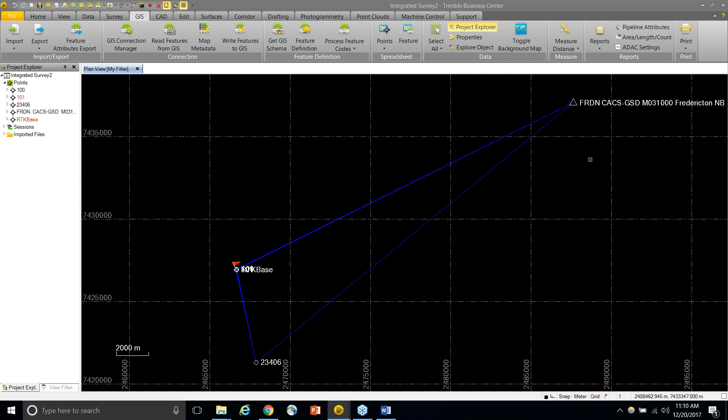Some of you may remember me from past Power Hours, but currently, how this project ties into my situation is that I'm back at school, and the TBC team told me I need to learn a few things before I get back to work. So I've been learning about surveying and doing some GNSS work, and that's what you see in this project, a survey I did for a school project.

How this ties into the question asked by Khatib is that we're going to look at a project that has both grid coordinates and global coordinates in it. If you look at the grid lines in the project here, I'm going to switch my background to white, might be easier to see. It's displaying grid coordinates on the side - that's what we do in the plan view for Trimble Business Center, so you can work in that grid environment.

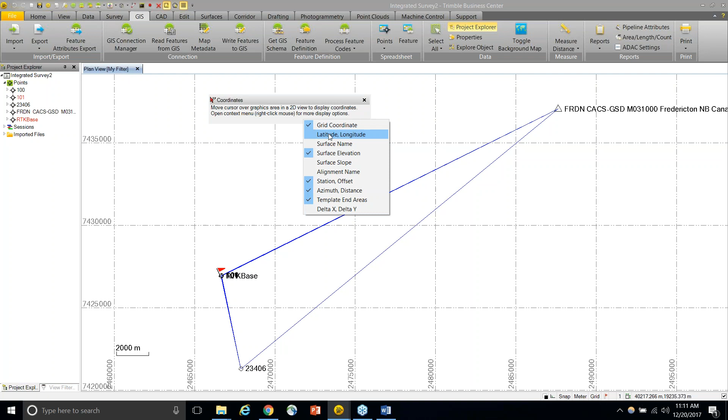But if I wanted to see global coordinates at any time and at any point in my project, I can go down to the bottom right here in this little scroll window. I'll hit that, and notice it displays the real-time update of coordinates as my scroll square moves across the screen. Now I can show global coordinates as well by right-clicking and selecting latitude and longitude. So now I can see both.

So for instance, if I wanted to know roughly what this position was for this FRDN station, I can see latitude and longitude, roughly 45, 56, and 66, 39. Now, to move that back, I can press the close button.

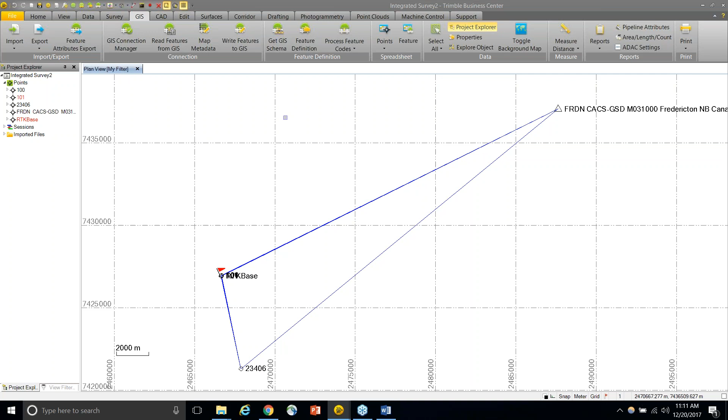Another cool little feature, in the question asked by Khatib, he referred to how do I enter a global coordinate while working in grid coordinates. So for instance, I have these points here on the side. I can add another point by going to the CAD tab and selecting Create Point.

Notice there's a box here called Grid for the coordinate type. I can just switch that to local or global - most likely you're going to want a global coordinate. And now I can type in latitude and longitude.

So if I wanted a coordinate, let's say I'll pick right here, for instance, and we'll select in - maybe we'll select here. I'll select that point, and it will display the latitude and longitude. I can do ellipsoidal height if I want as well, or the elevation. Oops, I didn't select the point.

There we go. And then I can add that coordinate, and I have a new point here on the left-hand side with my global coordinate entered. And if I right click and select properties, I can see those coordinates there.

This works the opposite way too. If I want to enter a grid coordinate instead, I could select this point number 1, right click, and hit add coordinate. Now I could add a grid coordinate if I wanted to instead. So this way, whether you're working from one side, you have the grid coordinate and want the global coordinate, or vice versa, you can do that - a couple options for you there.

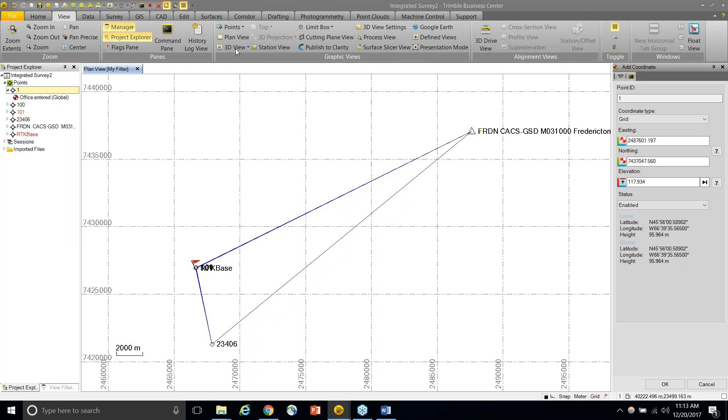Now when looking at these points, such as in a point list or a point spreadsheet, as you can see if you go to the View tab and select the point spreadsheet, I can show the latitude, longitude here, or the easting and northing.

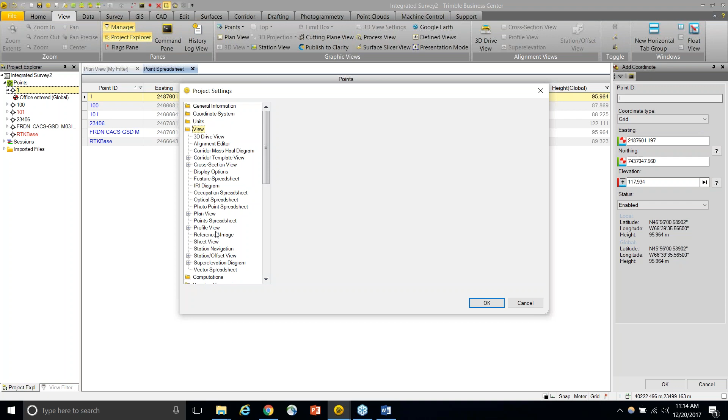This can be changed to show one or the other or both in the project settings, which is up at the top left, under the View tab, point spreadsheet. If I scroll down a little bit, there's a grid coordinate option showing right now, but I could remove that. Let's say I only want to show global coordinates - I'll turn that off, hit OK, and now my point spreadsheet shows latitude, longitude, and height only.

Awesome, so that was the first question asked, and I hope it was answered by that demonstration.

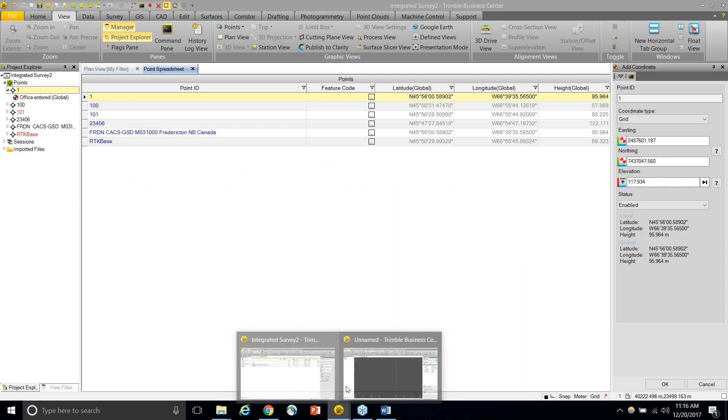All right, good, so now I've got TBC open here. What I've done is opened the import command. Notice on the right-hand side where it shows the file type, I've got quite a few different types of files. As I mentioned, a lot of our users have different hardware in the field - maybe a Leica level, a Trimble total station, a Leica GNSS, who knows. But how do we get all of that different data into one software? In this example, the question asked by Mete, we have some Leica GSI files, as well as an RW5 file, a Leica XML, and a RAW file. Notice with the Leica GSI file, it specifies a GSI format 16 level file.

Now if I right-click on this file, it brings up a screen where I can select various other types of Leica GSI files or similar file types with that extension - in this case a .gsi file. This shows all the specific importers we have for that file type, and in this case several different types. One concern is: what do I need? If I have level data, I'll probably want one of these three formats, depending if you're using international, US feet, or meters. But if I'm using total station data, I probably want to switch to the total station importer. We also have several other file types here that you can import.

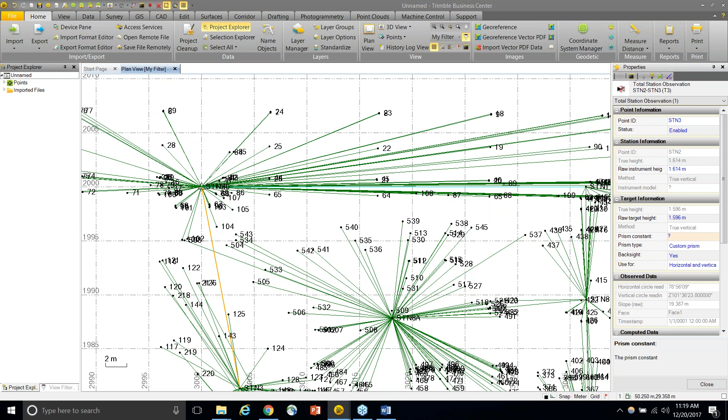In the Leica GSI format, the prism constant isn't included because it's assumed that it's a Leica prism, so it knows the constant. So just be aware of that. You might need to input a prism constant here. Then again, you might not. So some things to note.

Second part of the question is, can I use this data like any other Trimble data, even though it's from a non-Trimble sensor? The answer is yes, of course you can.

So for instance, I could do a network adjustment if I wanted. To do that, I'm just going to quickly set all of the stations here to see the total station data. We'll set the curvature corrections on, and we will go to survey. Let's do a network adjustment. For time's sake, we'll do a quick one, and we'll fix one of our stations and do a minimally constrained adjustment.

Oops, looks like I'm missing a setting there too. I'll turn that on, the sea level correction, and we're good, and adjust.

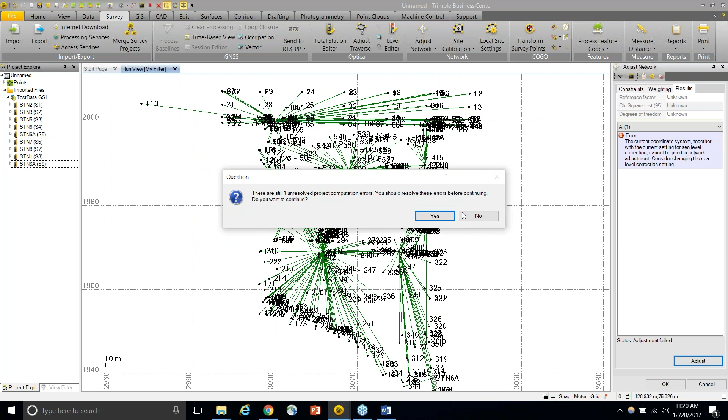All right, so unfortunately we failed the adjustment, but that's not the main point we're looking at here. What we are looking at is this is raw data like you would expect from any other Trimble sensor, but coming from different hardware. So you can take that and integrate it with any of your other sensors, and I can see, for instance, I'll select that station and see the error ellipse associated with it.

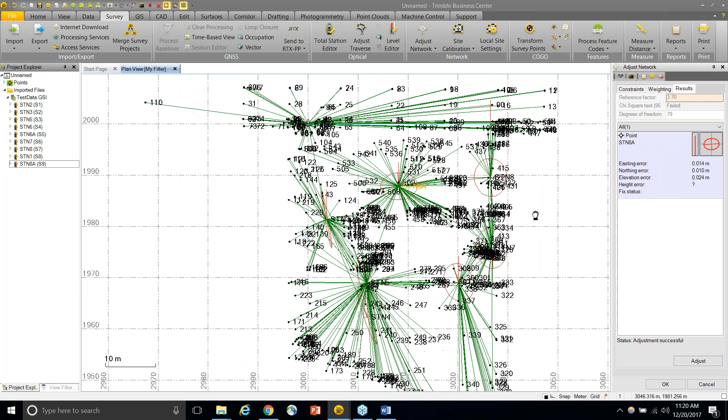Thanks for the great questions, guys, and glad I could participate.

Hey Riley, are you coming back to us? Maybe after I get more educated. I'll learn a few more things before I come back. You sound pretty educated to me, man. Thank you. We'll buy you a razor. It's cold here in Canada, so I'm getting prepared.

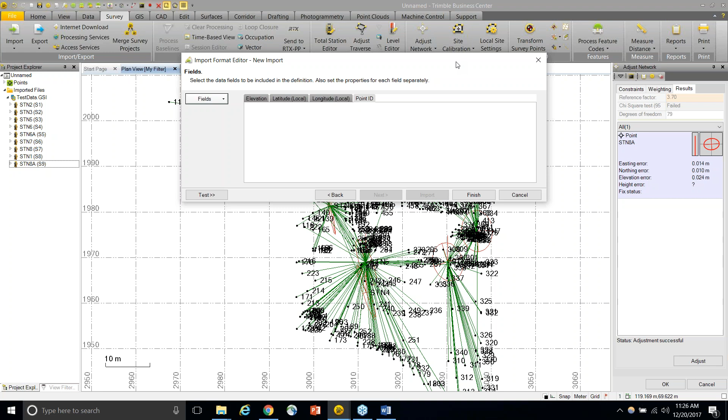Since Riley's got the screen up with the command showing, Joseph asked, can you transfer data from one VCE to another? Right underneath that survey tab there on Riley's screen, you see a merge survey projects option. That will transfer survey data from one VCE into another - give that one a try. It's for the survey data only. The CAD geometry line work will not come over, but survey data will transfer from one VCE to another with the merge survey projects command.

So what you're saying, Joe, is if you change a property of an observation or a point, or you're making a network adjustment or you process baselines, all of those edits are preserved when you merge that into a master VCE. Yes, yeah. If you wanted to organize your data by day, for example, and you had all 30 VCEs for any given month and wanted to get them into a master VCE, that would be the command to use to merge.

Ryan is asking, can you add total station to a GNSS network? I think this is one of the strengths of TBC. When TBC was introduced, or Trimble brought GNSS into surveying, the concept of flat surveys started mixing with the ellipsoid geometry. So one of the best parts is TBC's ability to really integrate those multiple data types. Definitely, yes, you can bring in total station data to a GNSS network. You can also bring level data on top of all of that, and you can decide what holds the elevation, what holds the height, and give weight to different observations.

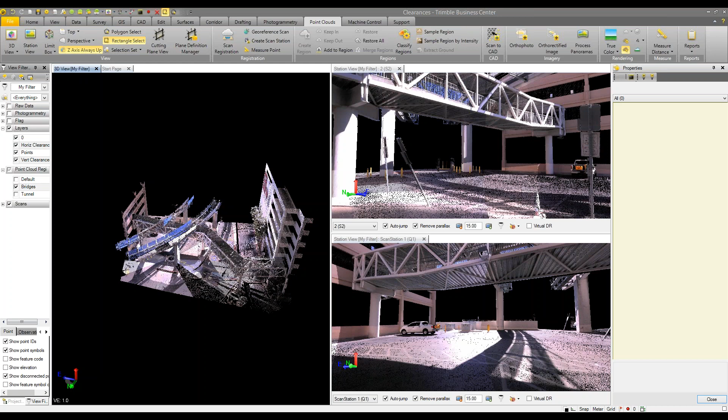All right, can you see my TBC screen? Yes, yes. All right, so what I want to show here is really the use of basic tools that we don't typically fully know in TBC, or we don't know to their full extent. What I have here is a fairly complex set with bridges and passes and stuff. And what I would like to know is really how much clearance I have underneath these bridges. So what you see on the screen is a 3D view. You have two station views of the same area, and I'm going to try to focus and see how much room I have underneath this bridge there.

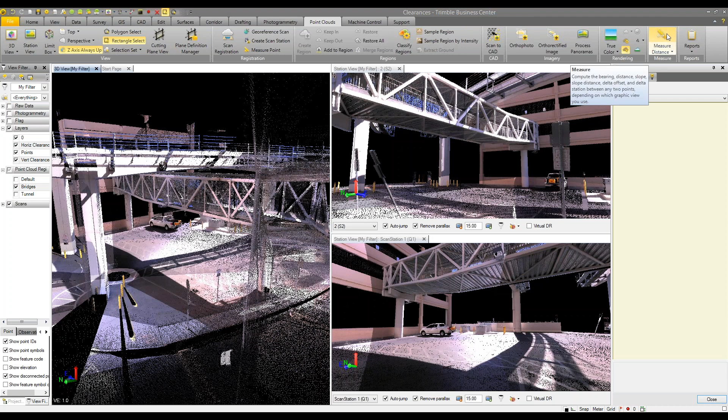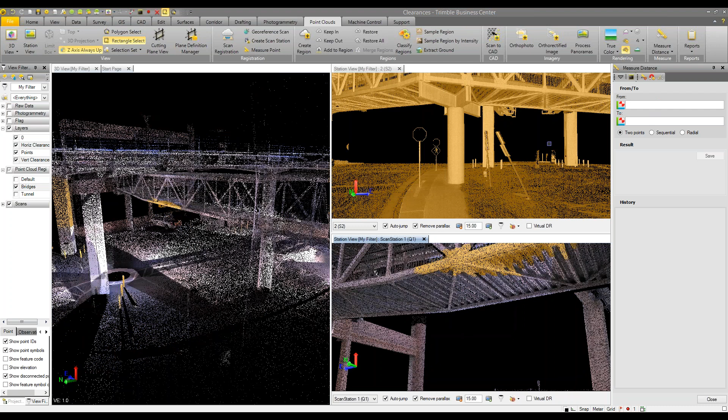So to do that, I'm going to use a simple measure distance tool, a very simple tool. And I'm going to use it from an example from the station view here. I'm going to pick the low point on the bridge here. Oops, sorry, I'm going to pick the... oops. So I'm going to pick the low point, if I can see it. Yeah. All right.

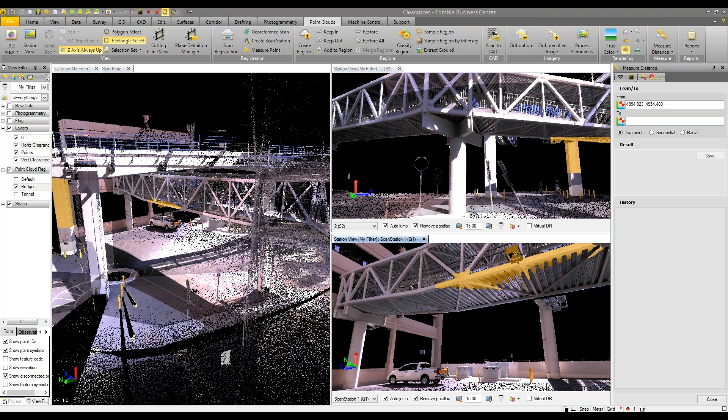So here, you can see the rubber band going from the bottom of the bridge, and I'm going to try to extend it to the ground. Since the ground is pretty flat, it doesn't really matter where I pick on the ground, so I'll just pick there, and it gives me a distance. You can see that distance in all views, and obviously the slope distance is not quite what I'm interested in, but what I can see is the vertical one, and that's the one I'm interested in.

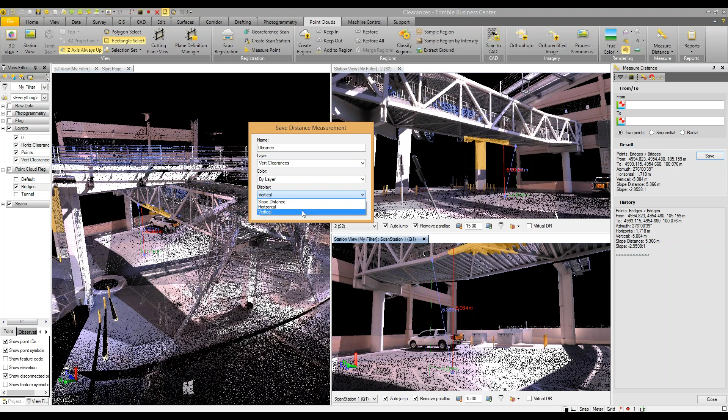What I can do is save it, so I can get back to it. I created a vertical clearance layer that I'm going to put my distance on, and I'm going to make sure this is stored as a vertical distance. As soon as I do that, I can focus on the vertical parts of the measurement, and it really is vertical - there's no doubt about it. This is from the bottom point of the bridge to the ground.

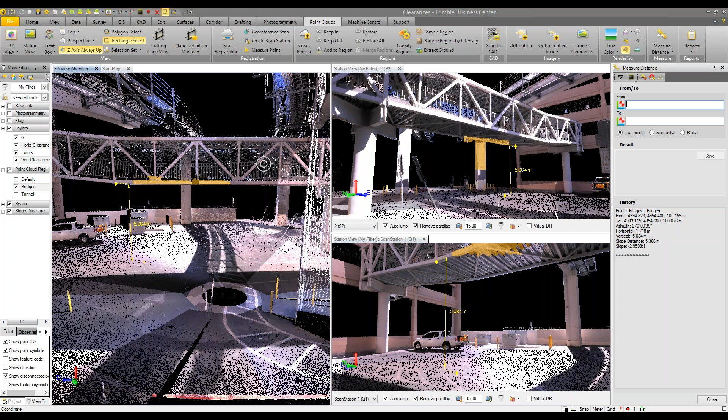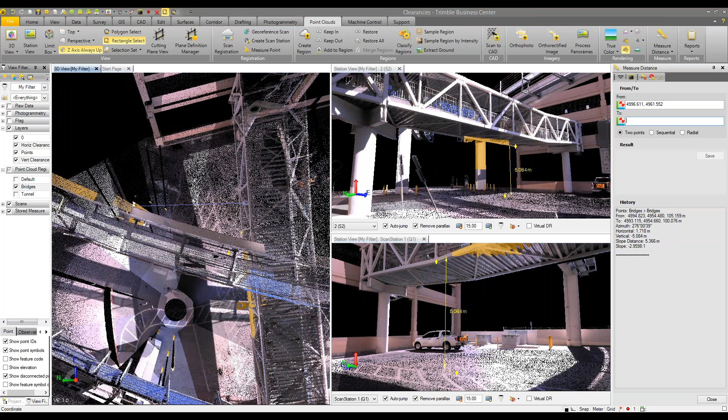What I can do as well is measure horizontally - for instance, measuring from this part of the bridge to another section of the bridge to see how much width I have here. So I can pick somewhere here, and same thing, it doesn't matter whether the heights are the same. What I'm interested in here is the green distance, which is 6.9 meters.

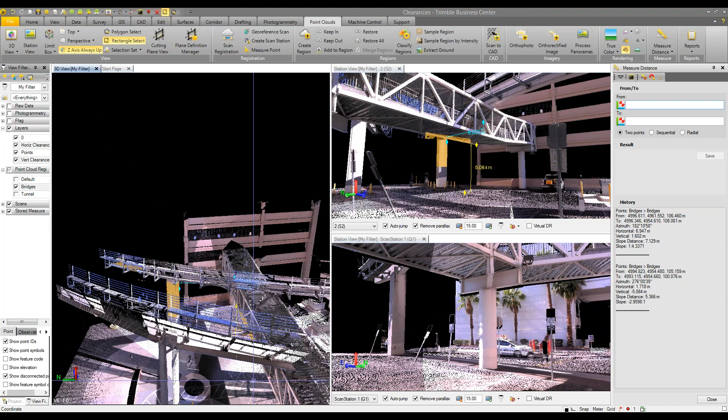What I can do is save it as well. I'm going to put it in my horizontal clearances and make sure it's stored as horizontal. Once I save it, I can see really the distance between those two points. I can keep going and measure another one here if I'm interested in a different part of the clearance - for instance, between this beam, from the bottom of this beam to the ground, and I can see it once again there, and save it in my vertical clearances.

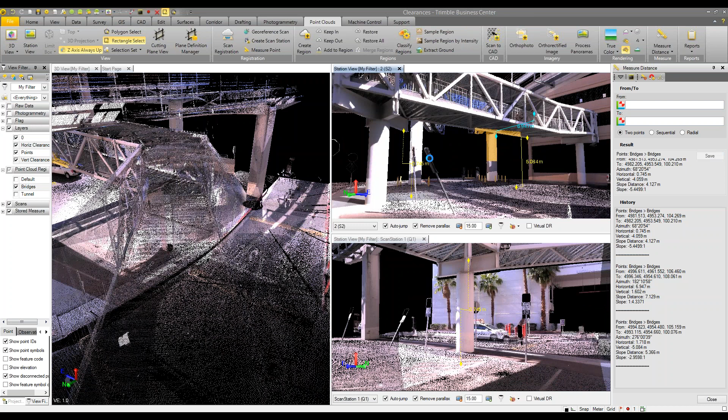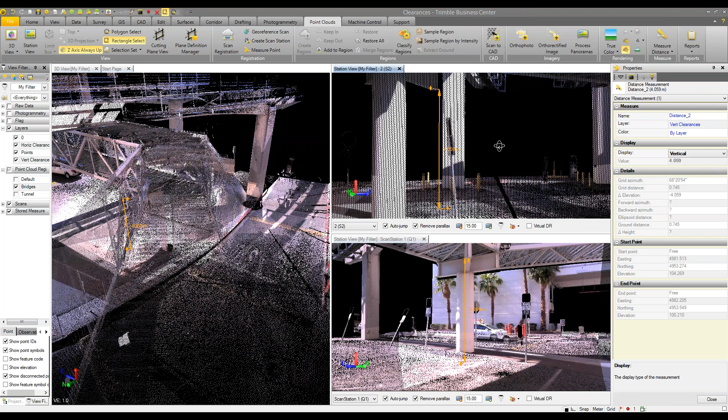If you pay attention, you realize that I didn't save it as a vertical clearance, I saved it as a horizontal one. So what I can do is select this one, get the properties, and change it - to a slope distance, horizontal, or the vertical one. In that case, this is actually the vertical I was interested in. So that's how you can do vertical clearances in TBC.

There is another workflow you can follow using a cutting plane view specifically, and this is interesting when the ground is actually not perfectly flat. In this case, I'm just going to clean this up, delete those, and bring a different point cloud that I have - it happens to be a tunnel, and this tunnel has a little slope to it.

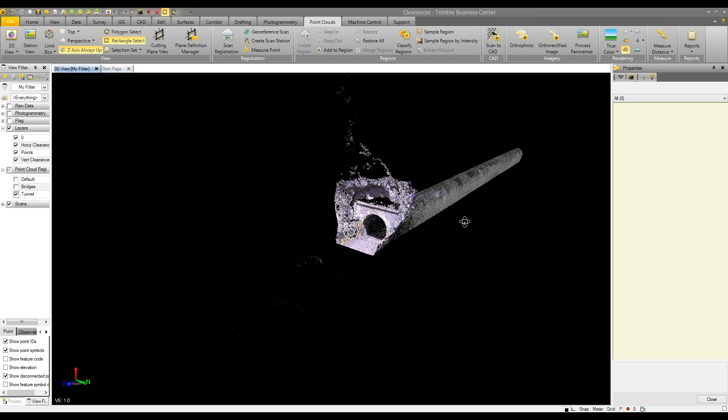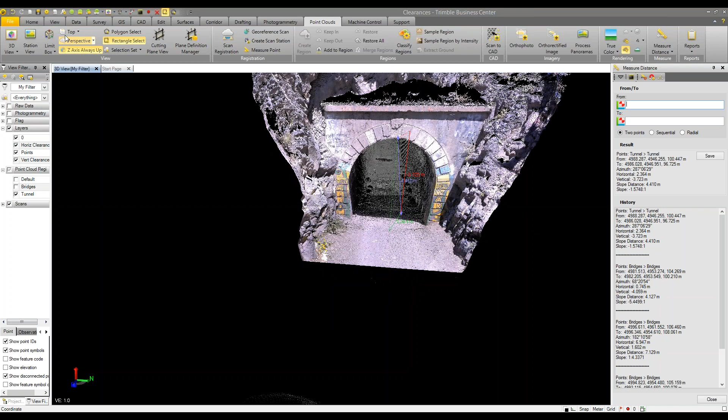If I follow the same workflow and do a vertical distance from the top of the arch to the ground, since the ground is not perfectly flat, if I look from the side of it, I'm going to see that this is not actually a vertical clearance. So even the red distance there is perfectly vertical but it's not the true clearance.

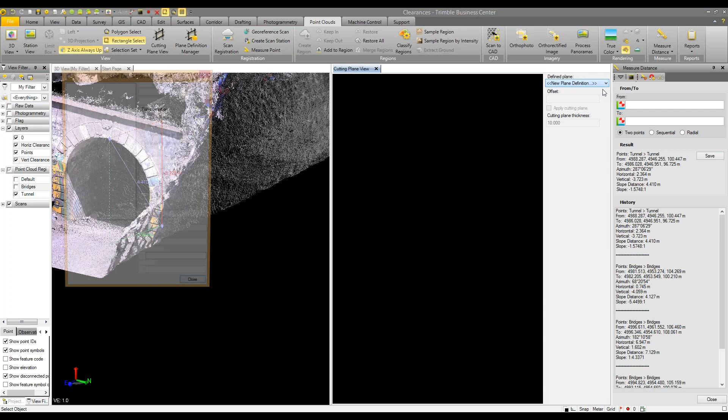So what I'm going to do in this case is use a cutting plane view, because that's going to help me a lot constrain the picking in the plane that I'm interested in. I'm going to create a cutting plane view, and since I don't have a plane yet, I need to define it. I'm going to create a plane and make sure that this is a vertical plane, passing through this point that I pick on this face and that point that I pick on that face.

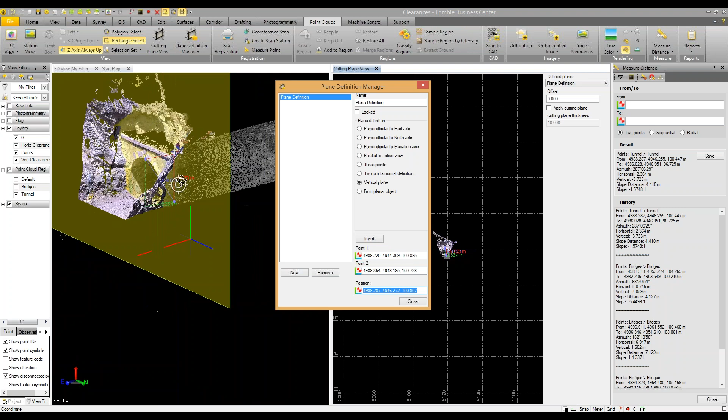If I zoom out, I can see that this is really the plane I'm interested in for the vertical clearance. So I can close this and zoom in on my cutting plane. In this case, that's great, but this is a lot more than I'm interested in, so I might not do the picking correctly.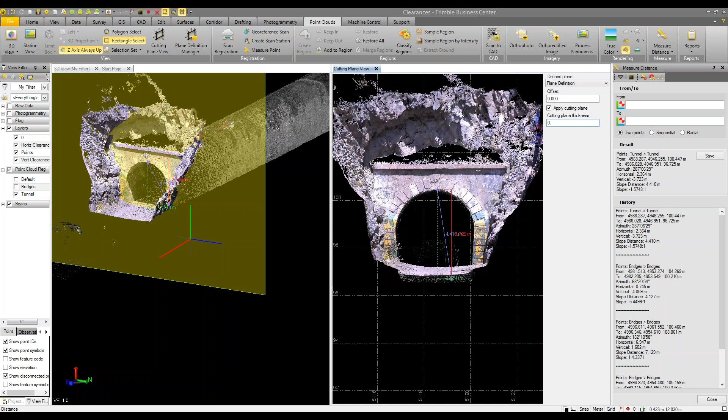What I'm going to do on top of this is check this box and actually cut the plane and restrict it. In this case, I have a thickness of 10 meters - 10 meters may be a little more than I'm interested in, so I'm going to do 20 centimeters, and that's going to restrict even more. Now I'm very confident that I can pick the distances, even with a little angle, a lot better than before.

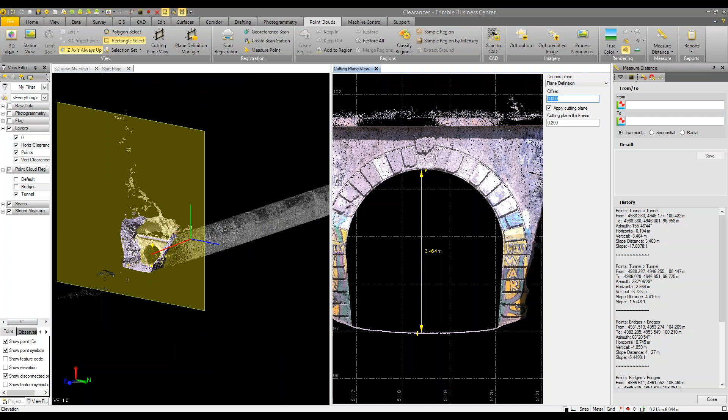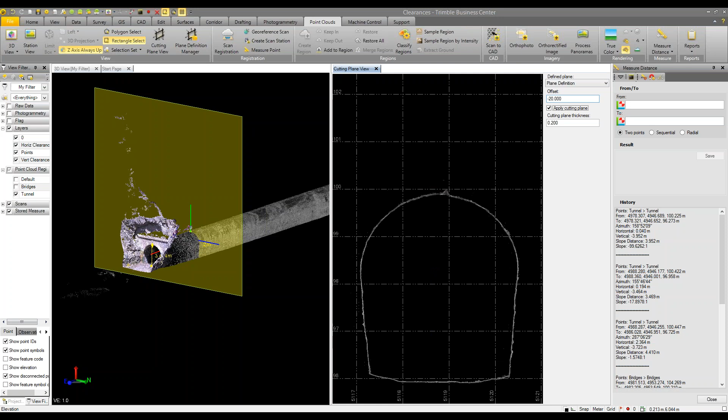So if I save this one, I make sure it's a vertical clearance that time. I save it, and we can see that it is actually perfectly vertical and exactly in the plane I'm interested in. Furthermore, let's zoom out a little bit - if I want to do a clearance at a given distance along the tunnel, I can go 10 meters further, add a little offset to it, and that's going to move the plane further. I can keep going and do the vertical clearance, measure it, save it again, and go 10 meters further, again and again.

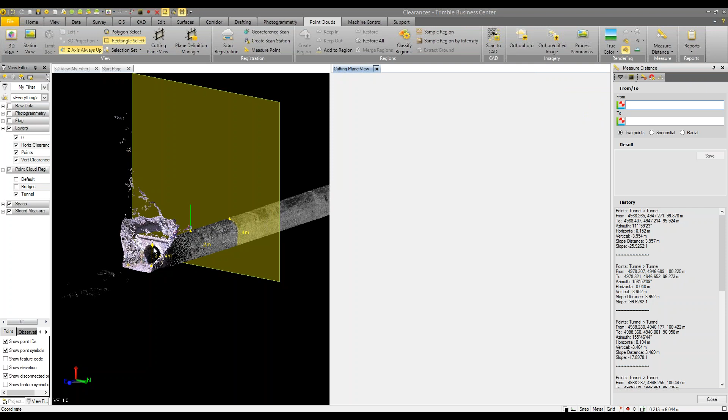In the end, I used the cutting plane view, slicing it at a given position to constrain my view and my picking, so that when I pick, I have full control of what I'm picking on. And if you look at this terrain, I have the different clearances all along the terrain, even though there's a slope to the tunnel. This is a good way to utilize a very simple tool, the measure distance tool, to measure clearances and width.

And I think that's it for the vertical clearance. Yeah, that's a great demo, Arnaud.

There's been two questions that came in from Babek, or Tobe, on how do I get saved distances into Drafting, and how can I share them outside of TBC. There's two answers that come to mind immediately. We've got a dimensioning routine that will export into CAD, and we've also got a new web-based data sharing service called Trimble Clarity that lets you publish data on our Trimble Connect platform and share that information with clients with a simple URL, which can compute basic clearance measurements as well.

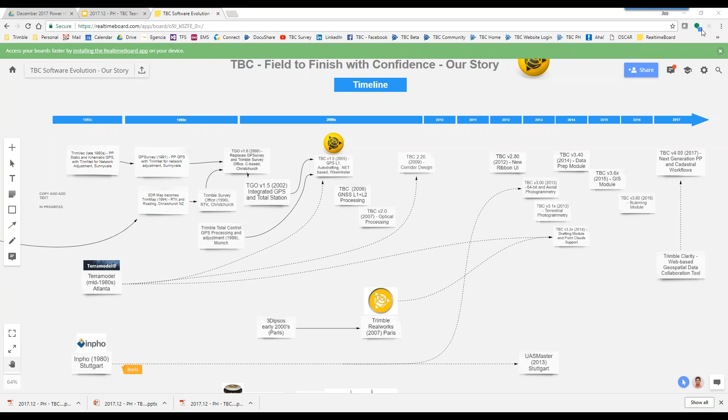Excellent, thanks Joe. Before we talk about the future of TBC, I'd love to quickly recall the past. I get this question very often, like, when is Trimble going to start introducing another software? It's been an industry trend in recent years that major vendors reintroduce their platforms or re-platform very frequently. I can assure you that from TBC's perspective, that's not going to happen anytime soon.

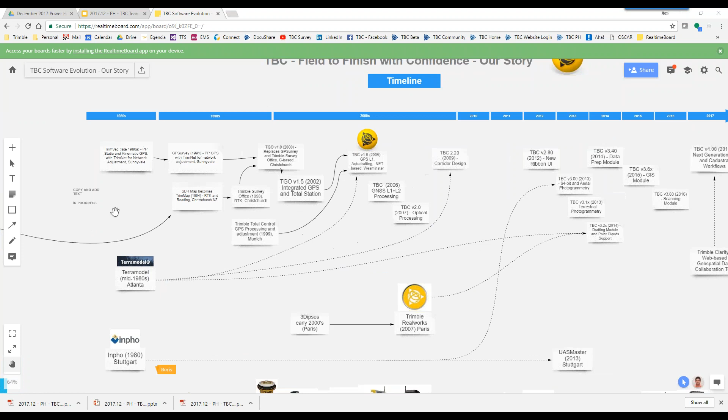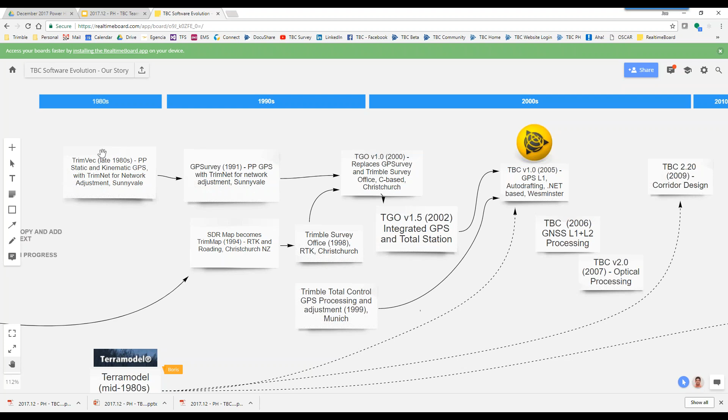This is just a short chart, so apologies, it's more for internal use, but it shows our history in the software going back to the 1980s, where we had TrimVec that did the post-processing, static and kinematic. Probably some of you on the call recall this much better than I do. I actually started using Trimble software in the early 2000s with TGO, but we also had a software called Terramodel, which I'm sure a lot of you are very familiar with.

This just shows the history going from TrimVec to GPSurvey with the same TrimNet module for network adjustment. We had a software from New Zealand, SDR Map, which actually didn't become Trimble Survey Office, but the same team worked on it using a different code base. That was the first attempt at a Windows-based platform.

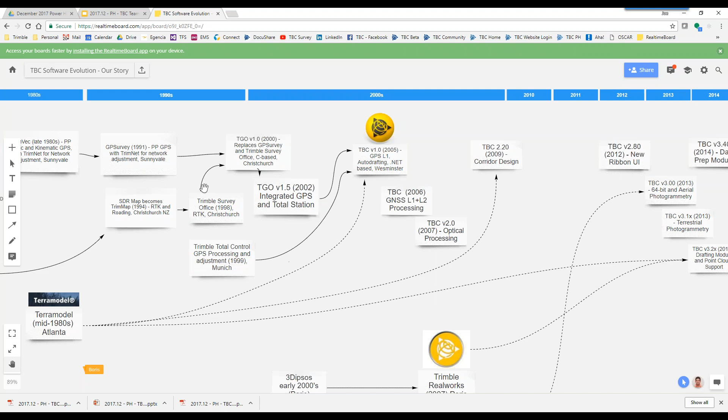So then we decided to really merge the capabilities into Trimble Survey Office, creating TGO version 1.0, and that was a fantastic survey software, if you all recall. Then into TGO 1.5 later, we integrated both GPS and total station. We were asking ourselves, what are we doing, reinventing a new software every few years, if you look at that history. Then we also got a new team on board from Atlanta, from the TerraModel team, and development on TBC actually started in the early 2000s.

I believe it's 2001 or 2002 where the platform was created. The idea was, instead of reinventing the wheel and doing a create line command in 5 different Trimble software packages, let's figure out how to build a platform that multiple software groups in Trimble can use. So we started this platform called Symphony, on which TBC was born in 2005.

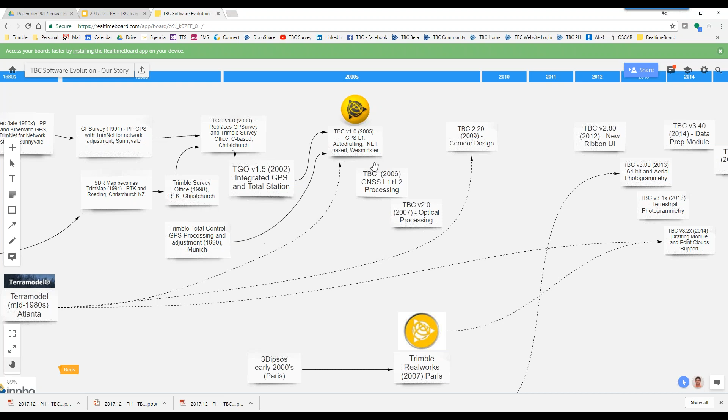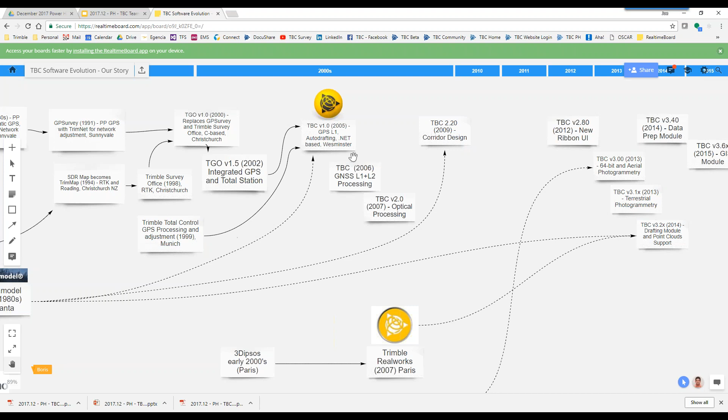The first release of TBC was L1 processing only. A lot of the auto drafting and feature coding was actually contributed from the Atlanta team. We started incorporating TerraModel commands, which came more heavily a few years later, because there was a lot of groundwork to be done around surface creation, corridors, and other features we wanted to get from the TerraModel team first.

You can see the evolution here: after GPS L1 only, we started adding GNSS, then optical processing in TBC 2.0 in 2007, and corridors came later in 2009.

You all remember the pain points we went through when we introduced the new ribbon UI, moving away from having thousands of icons on the screen.

TBC 3.0 really started as the 64-bit version of the software. Computing power was becoming more of a commodity at that time, versus the early days where it took a whole day to process a baseline.

We really excelled and started expediting all of that development. The reason TBC has grown so much is because of the contribution of all the teams mentioned earlier. All of those teams continue to work on TBC, so now there's a larger pool of Trimble engineers contributing to the Symphony platform.

Not just TBC benefits from it, but also the heavy civil edition of TBC, software like PostPack, cadastral software in Germany and Japan that Trimble provides. A lot of groups in Trimble may use just a single component of TBC, for example a create surface function for SCS 900 or something like that.

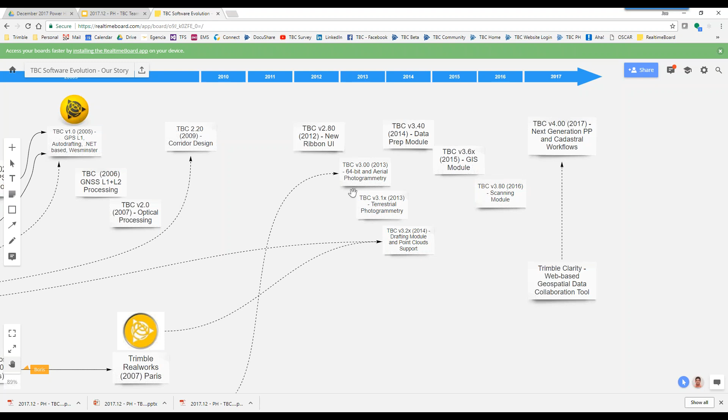That's really a success story, and one of the reasons we were able to crank out so many releases, as you've seen in the last 5 years.

We started adding terrestrial photogrammetry in 3.1, leveraging Trimble Vision capabilities, and adding a drafting module, again contributing that TerraModel concept with the DynaViews.

Trimble RealWorks played a critical part in providing us with point cloud capabilities, like what Arnaud was showing with managing point clouds. TBC can manage virtually unlimited numbers of point clouds using the exact same engine as Trimble RealWorks. So all the development that happens on Trimble RealWorks benefits TBC, and vice versa — that's the power of collaboration in a larger company like Trimble.

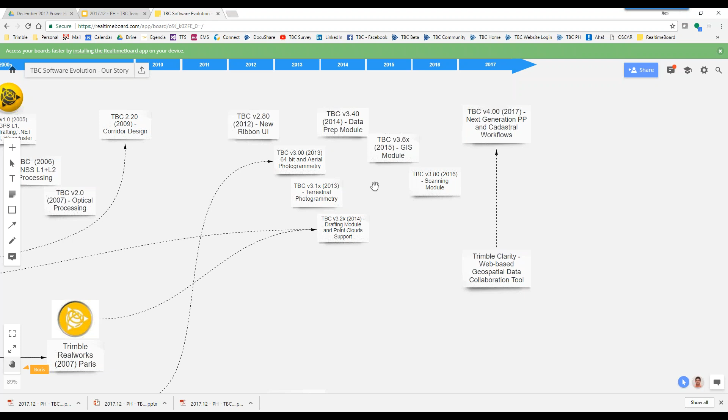We added a data prep module in TBC 3.4, GIS in 3.6, and a scanning module with the release of Trimble SX10, along with some registration and automatic classification capabilities later in 3.8 in 2016.

Now in 2017, as Joe says, we started focusing back on the core — basic cadastral routines — and leveraging more cloud-based capabilities, because you live in a connected environment where people don't want to move data multiple times. Trimble Clarity is the first example of how we can leverage and benefit from those collaboration tools a bit more.

Goes back to the presentation. I hope this history overview was interesting for some of you. I think it helps understand how we got to this point today.

Our mission is to be the survey office software enabling field to finish with confidence. So we are not a design CAD, we are not an enterprise GIS — we are a survey software.

We see a need among surveyors who might use one or two commands from GIS or CAD. If we can introduce those in a way that surveyors think about, we can be very successful and provide a complete workflow, keeping in mind interoperability, as Joe said, with all the other players out there. So our message is really about capability, but also compatibility.

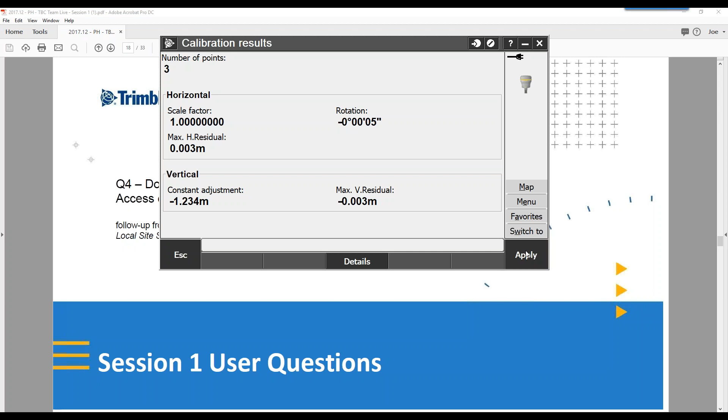So now if we apply this, I can actually take the same job from the Trimble data. Let's make a copy of it, and we can drag that into TBC. Open up a new project here, and we can just go ahead and open our site calibration.

You can see we have these same basic options. We can set that scale factor to 1 again, and we can make it so it's just a vertical shift. One extra thing we do have in TBC you might notice is this update product definition.

This is really helpful if you're dealing with GNSS points that might be based on a state plane grid or another grid system. You might have coordinates in the millions, and you're calibrating it with known grid points, or just local 1,000, 1,000. So you might need to do that if you're dealing with grid and ground. You'll get some really high scale factors if you don't change your product definition to where it should be in your new calibrated system. You can also see down here that we're actually in a calibrated coordinate system.

I need to click on that, but just hover over it. And we can go into our point list here, back in site calibration, and you can see we have these same pairs already in there. We have the same options to use them for horizontal, vertical, just horizontal, or ignore them. So we'll recompute this, and we'll actually delete the old calibration. We'll say yes, and we should get the exact same result.

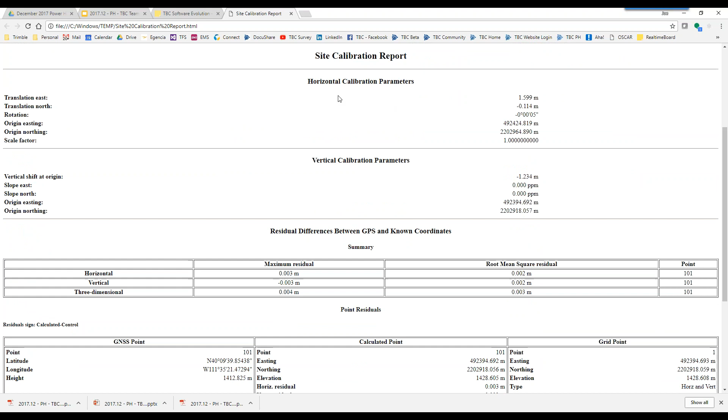And the one final thing is we have reports we can generate up here. We have the site calibration report. You can click on that, and it will open up this new HTML report. You can save that. It basically has all the information you could ever want about your site calibration, coordinate systems, any ground scaling, local site settings, and then your actual calibration parameters, residuals, and coordinates.

So hopefully that answers that and shows the differences. Like I said, fundamentally the same, but hopefully there's a little bit extra you can do in TBC.

Yeah. Thanks, Adam. Thank you, Adam. Back to you, Joe.

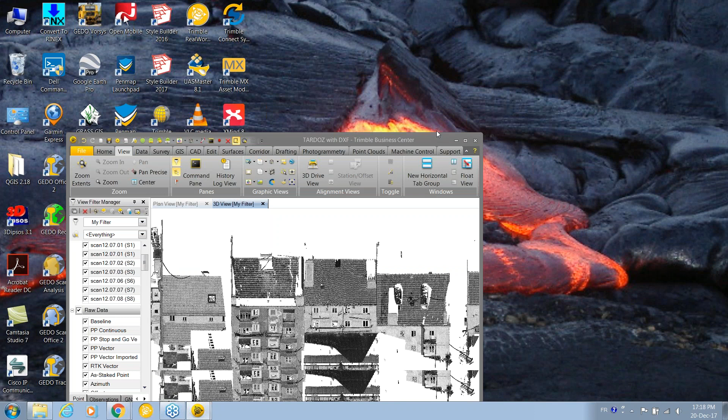There we go. Can you see my screen right now? Yes, perfect. So yes, definitely we can do all this inside our Trimble Business Center using the SX10 data. Just need to move that screen away. Sorry, so you can see my TBC right now, right? For everybody on the call, this is a different French guy. Yes. Maybe Arnaud, you can tell us a little bit about yourself.

So my name is Arnaud Lezenec in French—it's better. I've been with Trimble for 20 years now, started with Mensi. So 3D scanning is like my working life, I should say. I'm glad to show you some point cloud; I'm fairly familiar with them.

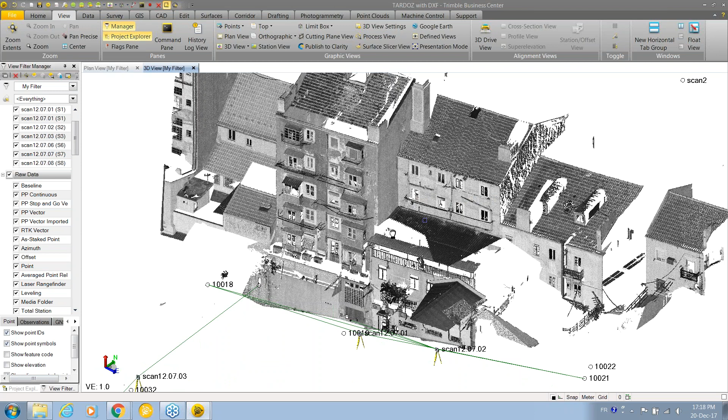So that example is a real example from Portugal, where the client bought a Trimble SX10, the scanning total station, to do a corps de rue, as we call them in France—basically building elevation. I will show you different techniques, and at the end we try to do some drafting, because the customer was gentle enough to give me the final result. So here is the point cloud.

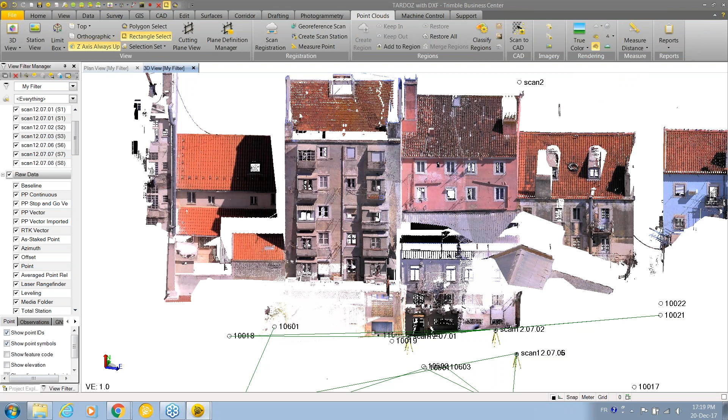As you know, in Trimble Business Center we have that point cloud tab. I'm going to switch the point into true color because, as you may know, the Trimble SX10 has very powerful cameras built inside. So first thing I will do is the segmentation to select the building—I'll show you some little tricks.

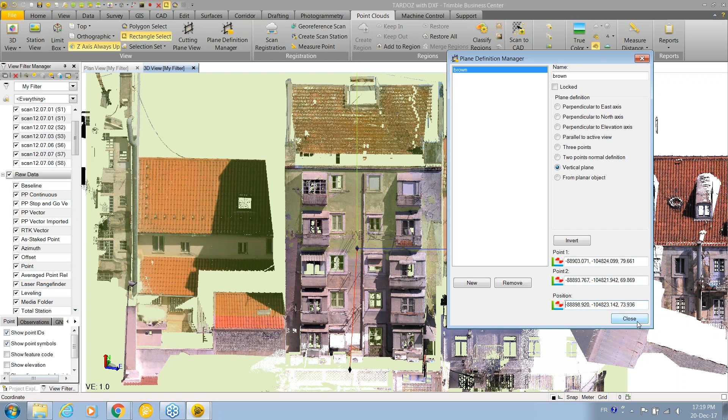Arnaud did show you some as well by doing a new plane definition. So I will make a new plane, give it a name—that's fairly important as well—make a vertical plane, and select two points on the facade and a third for its position. Voila, and now I can go to the cutting plane view.

Basically, I'm going to do some segmentation using that tool. So Arnaud stole my tricks—that's fairly sad for me, but you already saw that, so I'll show it again. To keep that building, I could change the thickness, let's say to 2 meters, to just keep the building facade.

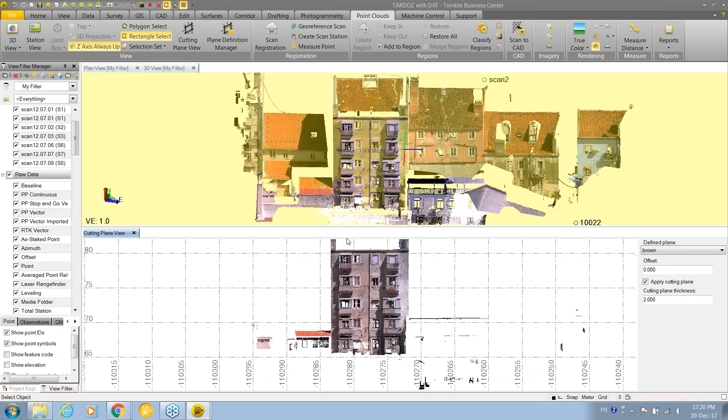Then the next step inside TBC, we've got that CAD tab—CAD menu, we can do many CAD drawings inside it. So I'll do it quickly: I can make a rectangle, give it a name, and use that little button to make the auto advance, so I can do several rectangles in one shot.

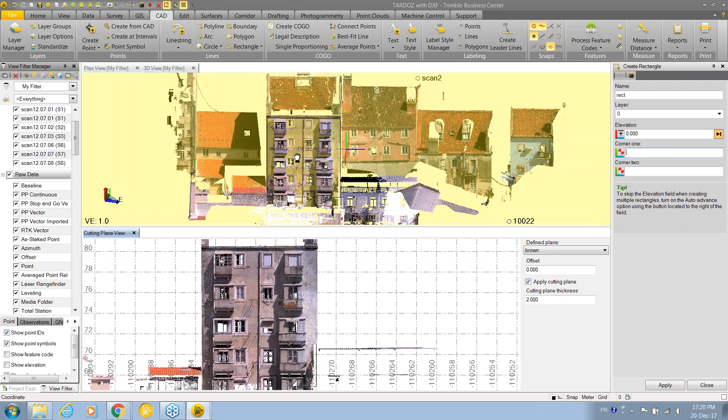So let's say I do the shape of the building—now you can see it coming in the 3D window on top, I hope you can see. And I can do some little windows; I'm not doing a very good job here, but just to show you the principle—doing some drawings inside, and then you can continue, of course. I could spend a few hours on that topic, but I'll stop here for that one.

The next thing we can do, and it's a big request in Europe for instance, is to do an ortho photo from the scanned data.

So we get that ortho photo menu. Basically, you follow the steps: what do you want to use, depth, grayscale, or true color? Then your plane definition - I could make a new one, but I want to use that building facade here. Now I can pick two points to define the area for my ortho photo.

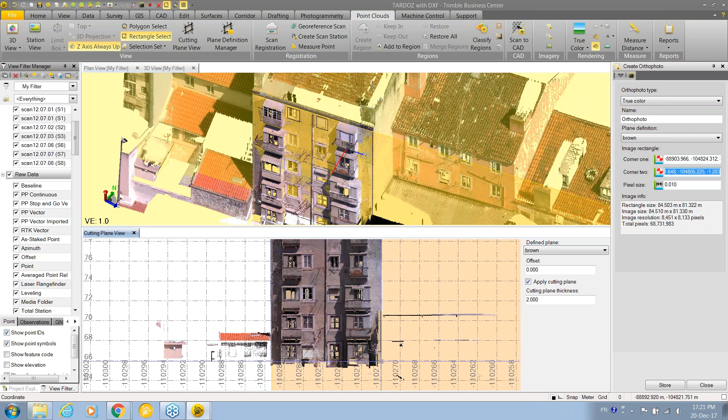Then you define the pixel size of your ortho photo, and then you can create it by just pressing store. So basically now I'm creating an ortho photo, and then I can use it also to make my drawings, or I can export it to third-party software if you want to.

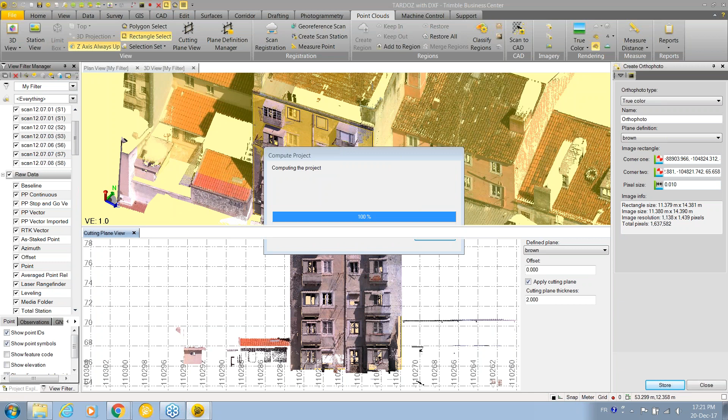But you can do also everything inside Trimble Business Center today. So we can see it in the list here - it's here, orthophoto. I can just show it like this if you wanted to see. I have too many screens in front, but this is a result of my orthophoto.

And then we can also export it, so you can just go to export into the CAD menu or to image exporter if you want to use it for another software. Another option you can use with the Trimble SX10, you can take a panorama automatically with very high density in terms of pixel. So what we can do as well is to make a rectified image.

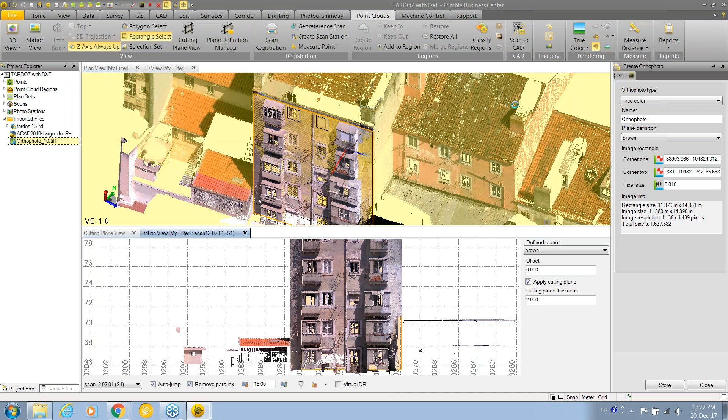So when I press a rectified image, I'm going to switch into a station view inside Trimble Business Center. So the customer did some resection because the road was so narrow - they had to move on top of some buildings on the other side, as you can see. So let's switch to station 6 here, at the bottom I'm going to switch to station 6.

Now we can see a bit better that pink building, but as you know, as you can see in 3D, it's a different depth. So what I will do, I will define a new plane. I just need to move that window back here - a vertical plane again. I'm going to pick points in 3D, one here, one there, and one here for the position. So now I move my plane to the correct location.

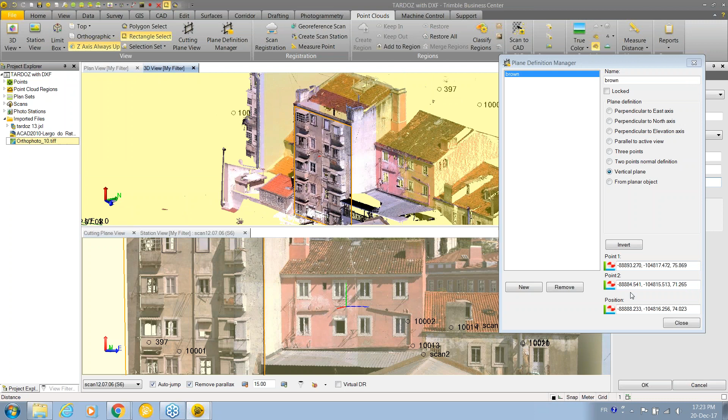I could have given it a new name, of course, just do it like this here. And now I can draw either in 3D or in the cutting plane view. I just want to show you something that maybe you don't know - I can select my corners. Oops, sorry, I just need to clean here. I could just go like this, and then start it again.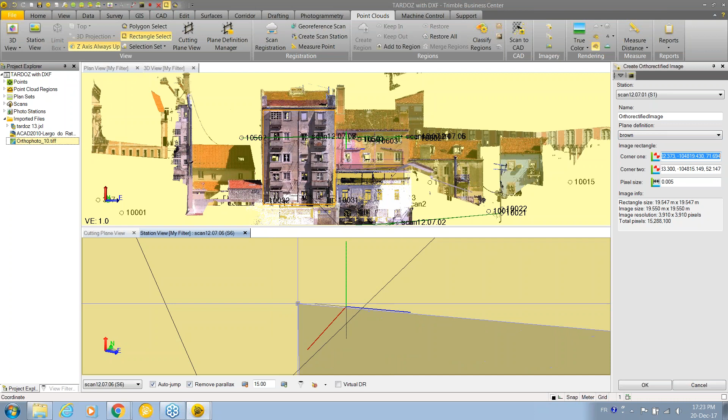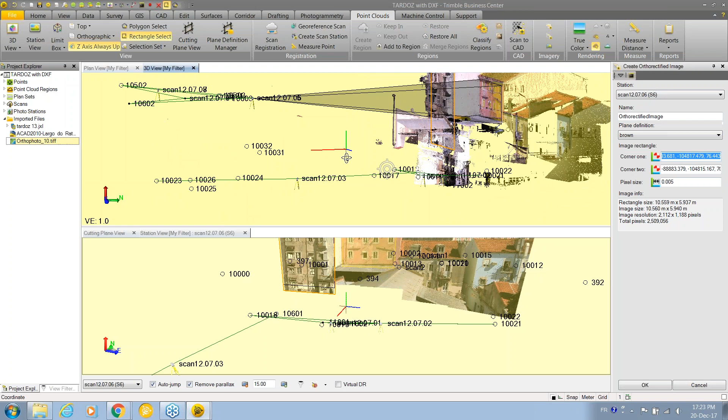I will make a plane like this. And here is just for you to see, it's using the station at the bottom, but I want to use station 6. So don't forget when you do it at home or in your office to change as well here the station to station 6. So now we can see, I hope you can see that cone of the projection, and I can make my rectified image - so different data source, you use a point cloud or you use the images.

And just if I can still have like 2 or 3 minutes, guys, I just want to show you the final result from the customer, what he did. Is that okay, guys? Absolutely. Perfect.

Hey Arnaud, what module are you working in? What's required to do all of this work? I think you know better than me, Joe, but it's using the scan, the point cloud, the scanning module. Yes, that is correct - that's a good question, Joe.

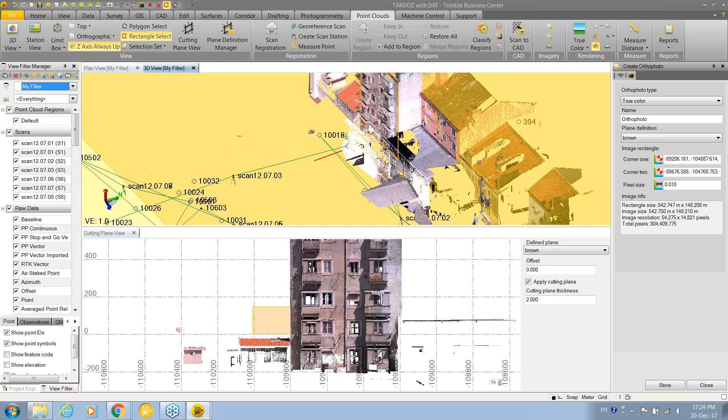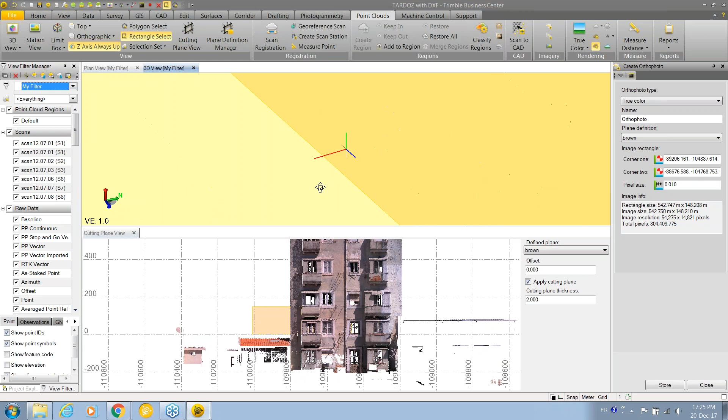I have a question - when would I use orthophoto and when would I use ortho-rectified image as a deliverable? So usually for a building elevation facade, I think you should use orthophoto because you want to be ortho to your facade. The rectified image, depending on the elevation of your station, you could see details from below, and that would be incorrect in a building elevation drawing. So that's why that customer went on top of another building to be really in front of the building facade, not from down the street.

And also, if you use a 3D scanner, you're going to use orthophoto because the point cloud will be dense enough. But with the SX10, you get the chance to get as good a result using photos or point cloud, so it gives you more options.

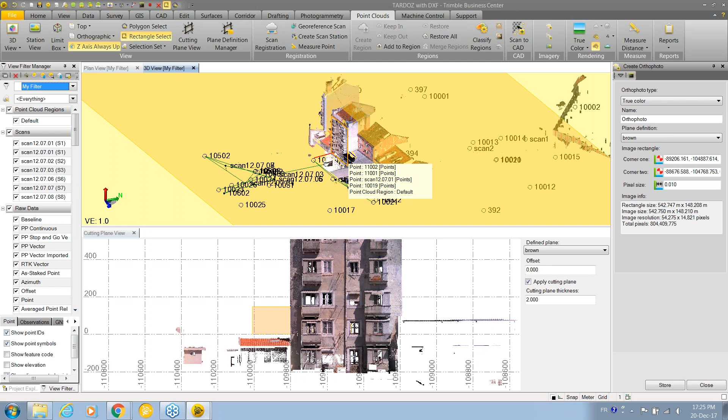So let me try to show you the result from my customer. It's fairly good - it's very, very good actually, I should say. I will hide what I did because it was awful. You can see the layers in the plane view, I just need to check them. So this is what he did.

So we can see the result here. Sorry, I don't want you to get seasick.

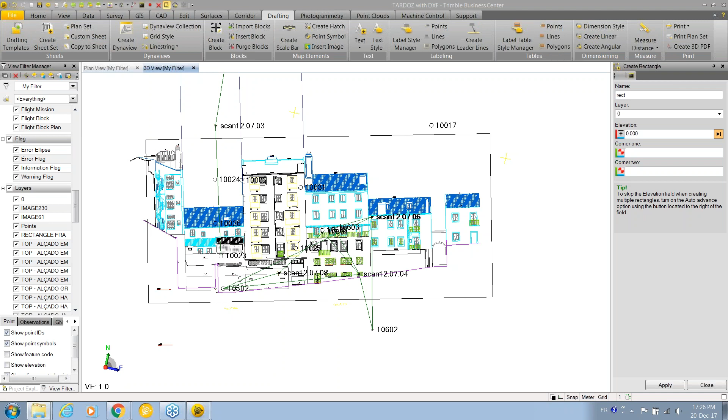What I propose to do very quickly is some drafting, to put that 3D model onto a piece of paper. In TBC we also get drafting, and maybe Joe will ask me which module I need - I need TBC Advanced today. Is that correct? That is correct. In TBC 4.00, we merged all of the functionality in the advanced drafting module into TBC Advanced, so with TBC Advanced and the scanning module you will be able to do everything that Arnaud is showing you here.

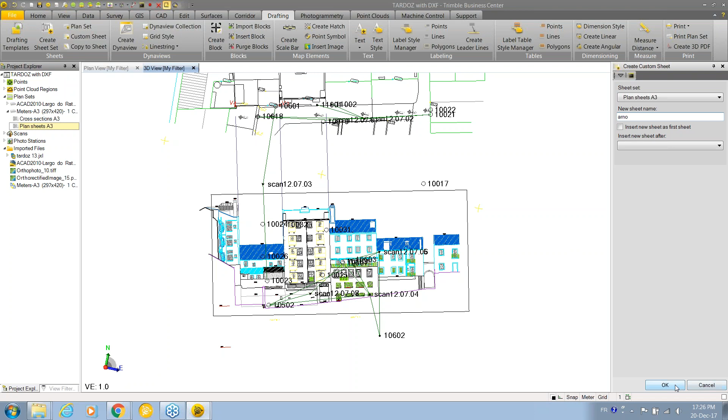So I'm just importing a template. I'll find it in my Project Explorer, plan set, meters - I use meters in Europe, sorry for my US colleagues or US customers. I will make a new custom sheet. This one is very difficult for me to pronounce with the accent, so I try not to use the word sheet too much. I'll just call it a piece of paper - maybe that will be better for all of you. It's really a challenge for me.

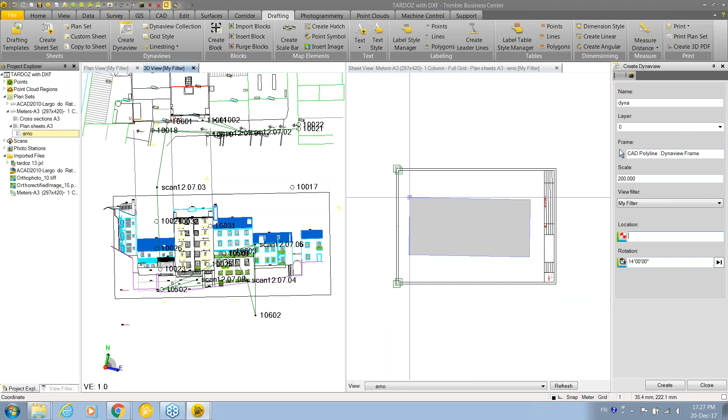Now I'm going to go to a view - I will not use that name - make a vertical tab view, and then I will create a DynaView. So dynamic view, I can give it a name. It's always better to put it into a layer, but I will not do it today just to save some time. I use a frame, define a scale, a little rotation for that case, and I can place it on my piece of paper. You can put some logos, of course, more details inside.

Boris likes to say it's always like a DynaView because it's dynamic. So you see those points - we don't want to see those points. That's a piece of paper again. This is a 3D view on the left, this is a piece of paper on the right. What I'll do here is hide the points, so they'll disappear in the DynaView.

The rectangle I used, I can go into my layers as well and hide it, if I can find it - I'm getting old, so it's difficult for me to see. The total station shots as well, I will hide them. So now I get something fairly nice. I didn't do it, obviously - the customer did - and then you can print it or make a 3D PDF, basically.

So I think that's it for me. I could stay online for many hours, but thank you very much. Thank you, Arnaud, we really appreciate it. And I didn't use my webcam because my beard is all white. All right, no problem, bud. Thank you, thanks Arnaud, talk to you soon. Yep.

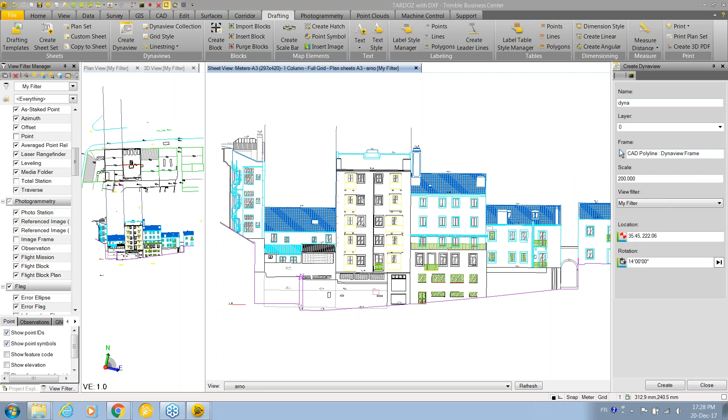All right, so in an hour and a half we've gone through five questions. Hopefully that's given you a little snapshot into the depths of what we're doing here. We're really excited with where we've gone, where we are right now, and where we're going. I will go very quickly through some resources that were teased earlier, and then we'll wrap it up. If you've got any final questions, please let us know.

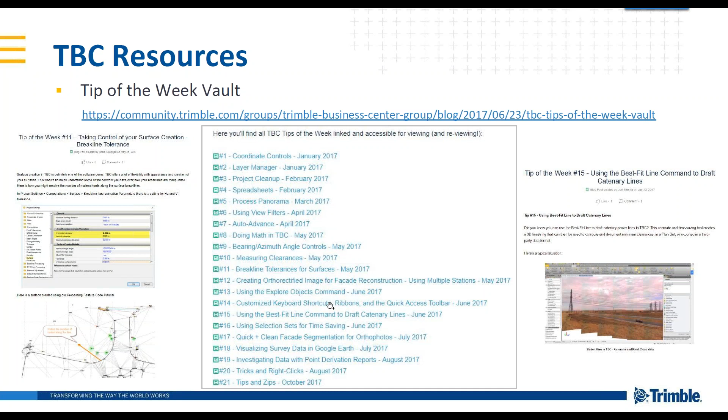We post updates there. It's a good way to ask questions and interact with us. We also have links to our power hours and our tips of the week vault. We've gotten a little away from that, unfortunately, which is my failure. We need to get back into doing these quick tips and documenting workflows. The workflow Arnaud went through is in tip of the week number 12. He documented and wrote that up for us back in May, on creating orthorectified images for facade reconstruction.

There's also the TBC Facebook page, where we're trying to be a bit more in tune with the social aspect, posting where we're at with conferences. I was in Las Vegas at Autodesk University, for example, and took a picture out of my window at the Venetian Hotel to say, hey, Trimble is at AU, and we talked to a lot of people who were happy to see us there. So check it out for outreach and to see what we're doing on Facebook.

Boris just had a nice trip down to South Africa and Mozambique, and he's got some images up there. It's a great way to stay in touch with us as well.

Certified training, if you're interested in learning more, maybe have a group, or if you're a distribution partner, we've linked the certified training request link to TBC. We're really trying to push our knowledge and what we're doing out and make it accessible, so investigate the certified training through learn.trimble.com and our training group.

Next steps: if you like what you see, if you're new to TBC, or if you need to update to version 4.00, the latest version, go to trimble.com/TBC. There's a download link on that page. You can get a free 30-day demo license of the entire package from your local distribution partner. If you don't know who that is, or you're new, check out this website. It's been recently redesigned, a sleek update that Michael and the rest of the Marcom team have been working on, to find your local Trimble distribution partner.